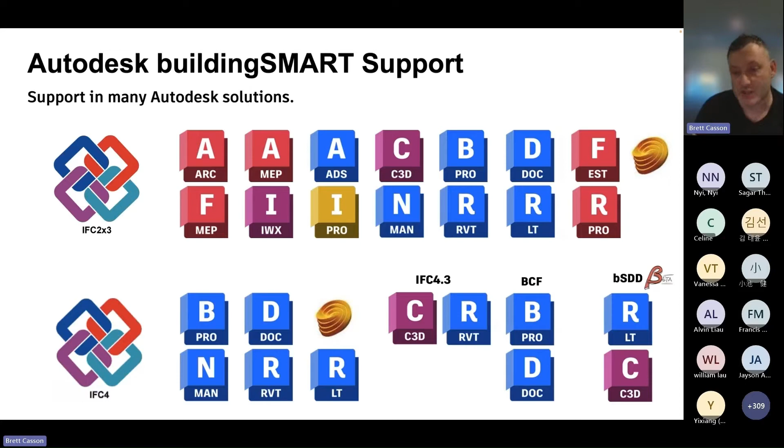and we're deeply committed to the open standard approach. And just as a quick reminder, I know this isn't about IFC 2x3, 4.3, BCF and bSDD, but our technologies do support all of those formats. We go through a rigorous campaign every year to ensure that our technology meets the requirements of IFC. And in fact, we've launched very recently our support for IFC 4.3, and we've got some work in beta for the bSDD initiative as well. So again, it's not just about this initiative, it's about a much broader context of interoperability.

The other thing that we've done is that we've put our support for Revit on GitHub. It was on SourceForge, but we decided to open that up and put it on GitHub. And I've got down there the Autodesk desktop app; that's changed to Autodesk Access. The reason we've done that is that we wanted to ensure that if there were major changes to IFC and our support for IFC, we could push those out very readily. And you, as the supply chain and the ecosystem and customers of Autodesk, could get those updates more readily rather than wait for a new release. And secondly, it enables us to receive direct feedback on how our technology is supporting IFC.

And we'll talk specifically now about why we are doing this as an industry. Because we need to unlock value. Interoperability is the linchpin of unlocking value. If we have solid interoperability between concept design, construction, and handover, we have value across the entire supply chain. But to do that, we have to unlock the data. So a lot of what the BCA are doing, and we congratulate the BCA for taking this initiative on, is to unlock data in the supply chain and ensure that we're deriving value from projects, not only building projects, but across building and infrastructure projects as well in the near future. And that's what IFC-SG and CORENET-X are there to achieve.

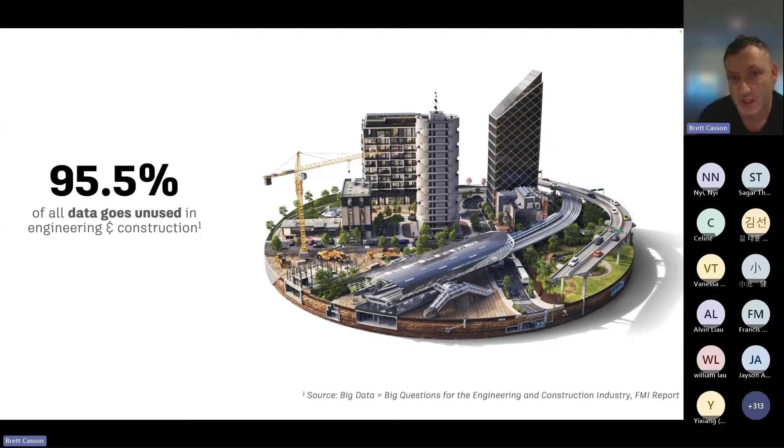One of the key reasons why we think this is really important is that we know that there is a lot of digital waste. There's a lot of data loss that happens in the industry. One report suggests that about 95 or 96% of all data goes unused in engineering and construction. And a lot of that data is our data, the public's data. And going forward, if we're going to have an unlocking of data and value in the supply chain, we've got to be better custodians of that data. That's why we support buildingSMART, but as importantly, we're supporting the BCA with this IFC-SG initiative. I've been working with Sagar and the team for almost 2 years now on this initiative.

And what that means for us over that 2 years is that we as Autodesk are creating a platform, and the minute that you create a data platform, you become a data company. And essentially that's what the BCA as an agency is doing as well. They are creating a platform and they are using data as the fuel and data as the engine. It's such an important initiative, not only for the building and construction industry, but for the whole of industry in Singapore. We have a series of tools that Sagar is going to touch on in a moment called the Autodesk Interoperability tools.

These tools support the enumeration, the validation, and the delivery of data when you use Autodesk technologies. And it's not just Revit technologies, we have technologies for Civil 3D and for other technologies as well. We are big supporters of standardization of data, but we've got to have the tools to support the way in which you standardize. We're going to talk about how we support IFC-SG in a moment and how we're utilizing these tools to help you as the customers be able to comply with the IFC-SG initiative.

All of these tools that we've spoken about are available for free at interoperability.autodesk.com/Singapore. We're working very closely with the BCA to ensure that our files that are hosted here are exactly the same files as what you can get from the BCA as well. And all of these check sets are in accordance with the latest version of IFC-SG, the most current version. And we've also created specific tools to support things like shared parameters and shared parameters file, specific to this initiative.

So we're really, really proud of this. I've been leading this with Sagar, as I said, for 2 years. We're extremely proud of where we're at. There's always room for improvement. And so that's why today is very, very important. There's 3 things that I want to leave everyone with today that will help us go forward as an industry. The first is this idea of unlocking data through interoperability. Interoperability is the key, data is the engine. And so as an industry, we need to do more in that space.

We are seeing a revolution from application to platform. Part of this initiative and looking further down the track with this initiative with the BCA in Singapore is about looking more at data and platform. And for us, having partnerships with everyone here today, plus our customers. So a multi-customer and partnership approach is exactly the right approach. We can't do this alone. And so that's why working with buildingSMART, the Singapore Institute of Architects, with the BCA and with other agencies and other institutions is supremely important, because we only know what we know and we need that collaboration for this to work. And so we're really proud of where we're at.

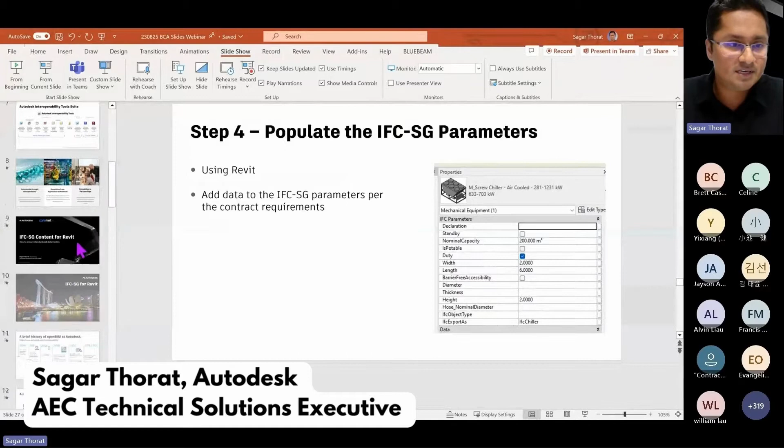So I'm going to share my screen now, and thanks everybody for joining, and thanks for all the presenters earlier. So let me just get started. All right, so our focus today is to understand the content that is relevant to IFC-SG for Revit. How do you ensure standardized data models? Most of you joining today are architects and consultants, and as the creators of this data and the BIM authoring that you do, it's important that that's conditioned for IFC-SG for you to have a successful CORENET-X submission.

So we have a set of tools and content that enables you to do this, to successfully export IFC-SG models, not only export, but prepare them. So we are talking about the shared parameters tool, standardized data tool, the model checker, and the content. You would have the shared parameters tool configuration file and the model checker check set for IFC-SG and a web page that will host all of this data.

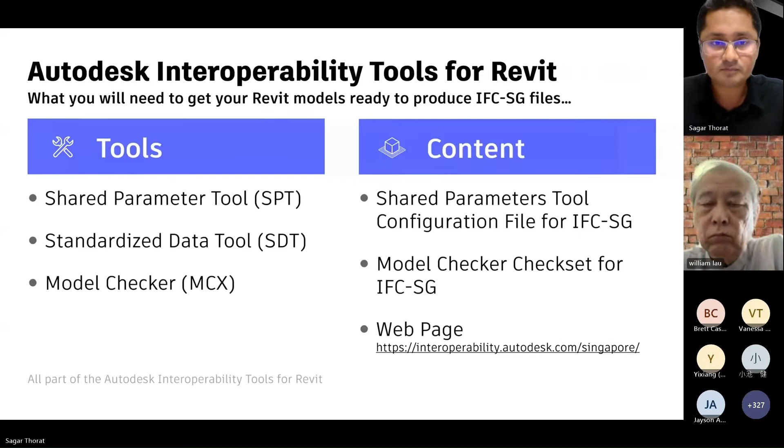Now we will understand where you can download these Autodesk interoperability tools and how you can install them. Most of the people might be familiar with this web page, so I'm just going to show it to you live. The link that normally everybody accesses as Autodesk customers is manage.autodesk.com. Here is where your IT or you yourself, if you have access, is able to manage all your software as well as all the plugins in it.

So if you go to all products and services, within that you will be able to search for Revit, and in that you'll have the interoperability tools. If you search for Revit, for example, within Revit you can view the details, and there you go, all your versions, the current version minus 3 versions, including 2023, 2022, and 2021. For all these versions, going under extension, you will see the interoperability tools version 9.1.8599, which was just released on August 9th, where you will find this tool complete. So the shared parameters tool has been released and is included in this version only.

The earlier versions don't have it. So if you have the earlier versions installed of the Autodesk interoperability tools, also called the BIM interoperability tools, please uninstall those versions and install the newer version. For all Revit versions, you can install them. You can install them from 2021, 2022, 2023, and 2024, right?

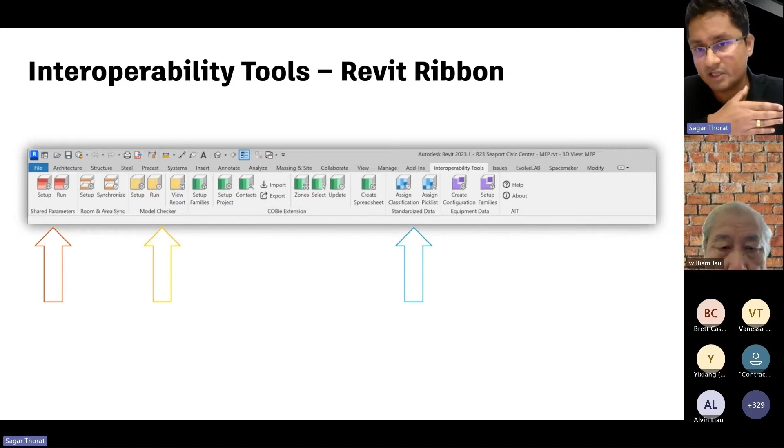And you will see on the left, to begin with, we have the shared parameters tool, we have the model checker, and we have the standardized data tool. These are the 3 key tools that you would need to be successful for IFC-SG classification, as well as preparation of your models and exporting them out. Okay. Now, these are available for current version minus 3 versions. So please remember, these are all standard across all Revit versions, current minus 3.

Okay, now the first key file is the configuration file, which is available to you for you to open and check, but ideally you shouldn't be directly doing it, you can directly set that file to be used, and you can associate the parameters straight away.

Okay. We have a check set file, which is called the MCX check set file, the model checker for Revit. The model checker for Revit, please understand that this is for parameters and values only. This is not for object-based, rule-based checking, which CORENET-X does, right? This is purely for you to have a clean IFC-SG model such that you can export them correctly, right?

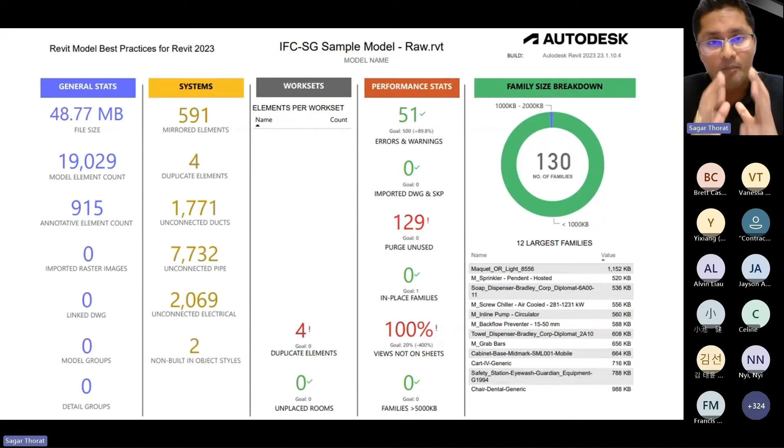So apart from the model checker itself, the model checker does include best practices, right? All the Revit users today, or all the BIM managers, BIM coordinators, should be utilizing this particular function, which enables you to create a dashboard and check your model health, right? Model health is super critical because this reduces the export time to IFC. Remember, you are exporting from Revit to IFC, and if you want to reduce the time of export, you would need a healthy model, right?

Healthy model simply means minimum duplicate elements, having views not on sheets, for example, or having unused files purged. Having a clean model is super important, right? So model health checks are crucial for you to export IFC models at a later stage.

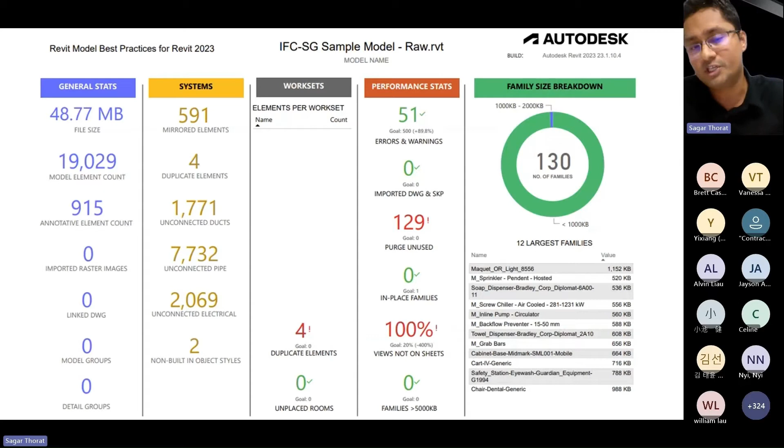So quickly looking at the parameters, step 1, which is your shared parameters file, which can be directly hosted inside your tool, and you can run it to add all your parameters. And then the second step is assigning IFC classification. It's a crucial step. Without assigning an IFC4 classification, you will not be able to export the IFC-SG correctly. Remember that classification is super important, right?

So let's dive straight into the demonstration. So our first part of the demonstration is to cover the adding of IFC-SG parameters using the shared parameters tool. And we will also cover populating the IFC classes. Yeah. So let's look at how you can use the shared parameters tool for adding IFC-SG parameters.

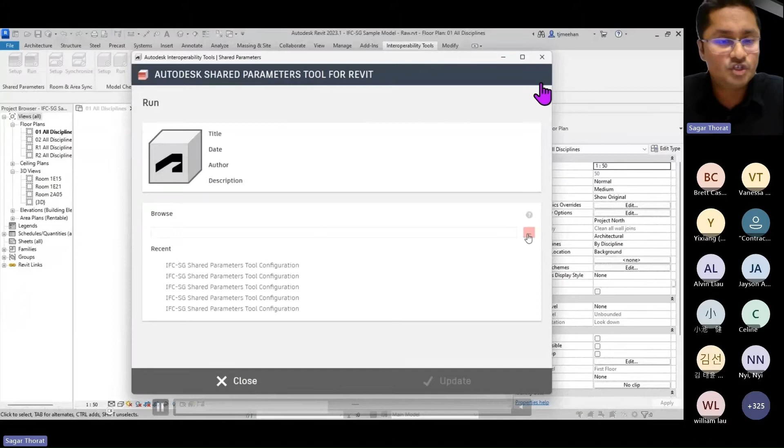Yeah. So let's get into Revit, right? So we will use Revit 2023 for this demonstration, and we will be looking at interoperability tools in the ribbon. And over here, the shared parameters tool can be activated. You will be choosing the configuration file, which is a simple XML file, and you will be running this file straight away, right? So once you have chosen, you simply update, and all your IFC-SG parameters will be added to your model. Whether it is an architectural model, structure model, or an MEP model, doesn't matter.

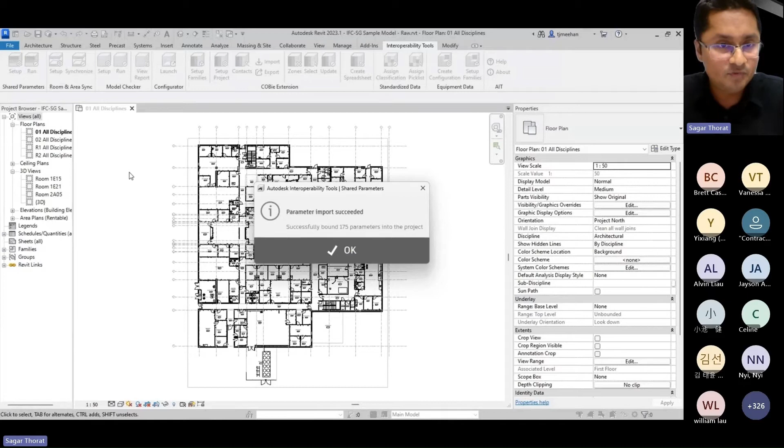All the parameters will be successfully added to the model without you going through the hassle of adding each shared parameter one by one, or going through the hassle of adding it through your Manage tab in Revit, right? So it's a simple 3-step process.

The second is populating of IFC classes. Populating of IFC classes is important because, remember, IFC-SG is based upon IFC 4.1, right? So IFC classes of 4.1 is what applies to IFC-SG. Hence, the IFC classification is super important. So what we would need is the standardized data tool, which is for assigning these classifications straight away.

So let's say, for example, I have this particular chiller. Now I have assigned all the IFC classes to it. Here are your IFC parameters, which are already populated. But what we need to do is to be able to populate the IFC export as well. So this is the classification which you would need to populate straight away. There you go. This is your IFC Export As, and how would you populate that?

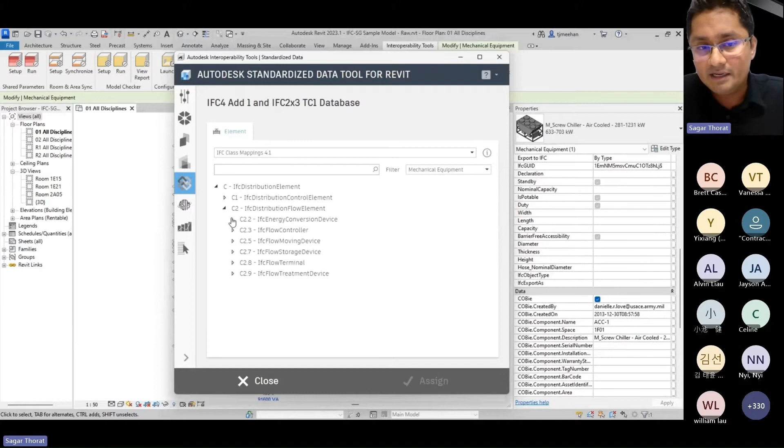By going to the standardized data tool and having the assign classification activated. Once you open the assign classification dialog, you would have to load in the IFC4. The IFC4 class mappings for 4.1 will automatically detect which element it is, and you can automatically select the IFC chiller in this case, and I can assign this classification to all the chillers at once. And there you go. You'll have the IFC chiller assigned to the IFC Export As value.

Remember, only the IFC Export As value is to be populated, not any other, such as Export to IFC As, which I'll touch base on in a while. So for example, here you would have the Export to IFC As and the IFC Export As. This is a default parameter from 2023 onwards. So remember that you do not have to touch this at all.

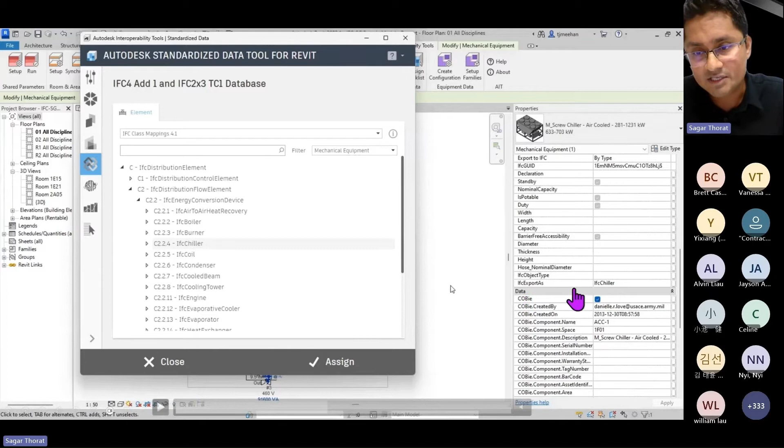Just focus on the IFC Export As parameter, which gets populated as part of your shared parameters when you populate the parameters from IFC-SG. So remember, only IFC Export As is to be used for classification. Do not use the Export to IFC As, which we have used to deliver this for other markets. But for Singapore, we will only use the IFC Export As. This will be covered in the guide as well when we prepare it.

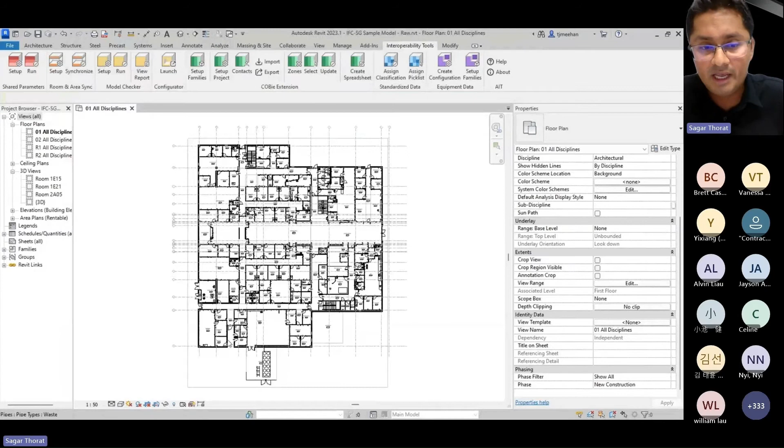All right. So once you have assigned the classification, you can do this for different Revit categories. For example, for pumps, in this case the centrifugal pump, I can assign this classification as well. So here you have the pump, and I can choose that particular subclass and the parent class and assign that to the model itself.

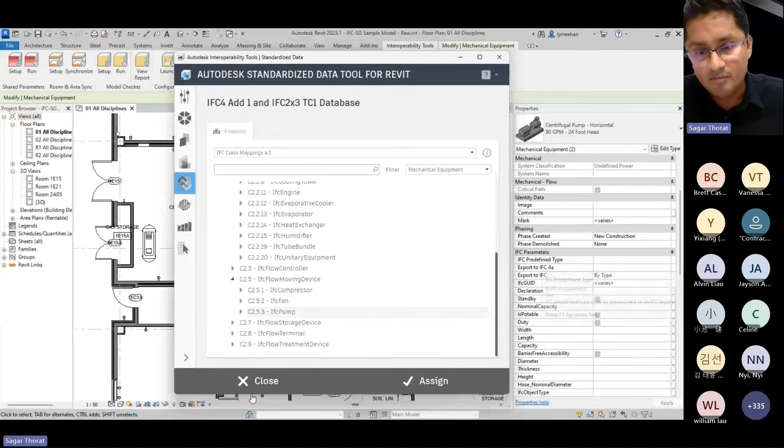Now remember that all these parameters are grouped under the IFC Parameters grouping itself, okay? So remember that the IFC Export As parameter will be grouped under the IFC Parameters. All of them will be grouped under this.

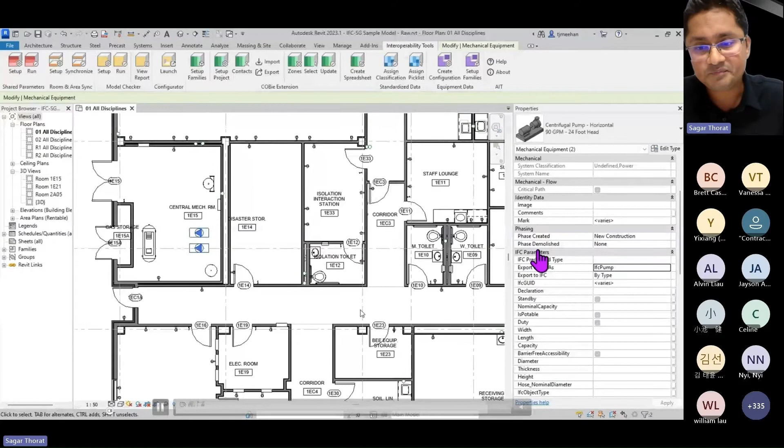So we covered two aspects, and we'll go into step 3 now. Step 3 is validation of these parameters. Once you have added the IFC-SG parameters and the IFC classification, now you need to validate it, to make sure that all the models your modelers, BIM engineers or BIM architects are preparing are correct. Each appointed party or task team would have to do this model checking. So you'll use the Model Checker for Revit for this one.

And step 4 will be populating the values, and the final step is to export to IFC. So let's run through the steps now. Step 3, as we mentioned, is to check your models. In order to check your models, you would have to validate these parameters. And that's where you will download the model checker XML file, which is the model checker configuration file. You can download that from the interoperability website.

So similar to the shared parameters file, the model checker file can also be downloaded from the same web portal where all the data is hosted.

Okay, so this is where the model checker file is. You will be able to download it right here. The model checker check set. It's clearly dependent upon the shared parameters tool configuration file itself. So this is your check set, this is where you can download it. And once you have downloaded it, it simply can be used for checking your models.

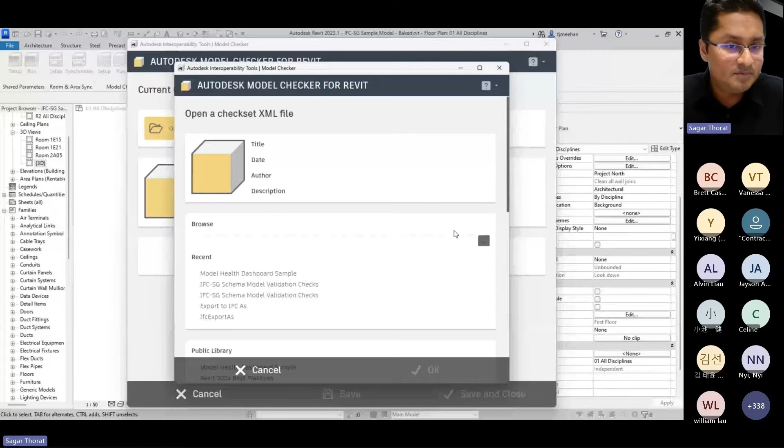Again, remember, these are all open data formats. It's an XML format, right? So here you go. We will use the model checker. First thing, of course, you can set this up. Setting up is simply selecting the particular configuration file, the model check file. Okay, that's the one with an XML extension. You can open it up, and there you go.

You can then choose which version of Revit you are using. There are checks for 2023, 2024, and 2022 and older versions. These have been separated because of the IFC export as and the export to IFC as, right? So please remember that people who are using 2023 and 2024 would have to use the checking for that particular version. And you can also filter by discipline, right?

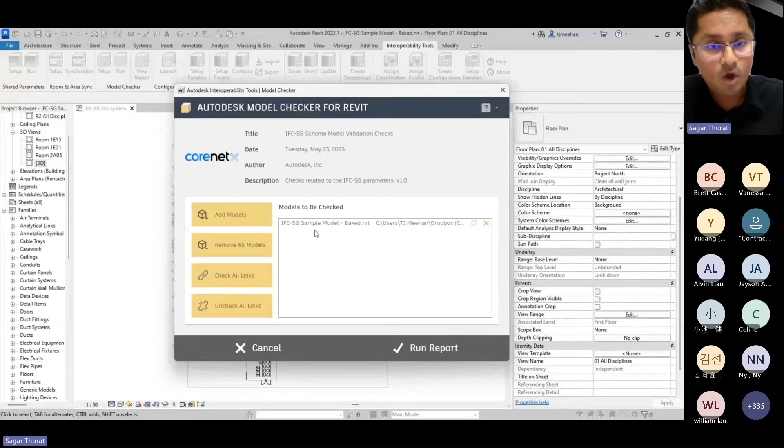So if you're just modeling the architecture part and you do not want to check anything related to mechanical and structure, the model checker allows you to do so, right? So you can specifically select only the Archi model and components, and you can run the checks on the models that are open, as well as the models that are linked to that particular Revit model. Yeah, so remember, you can run the checks on both. And within a minute or so, you should have the results. Depending on the model size, it might take 2 minutes or 5 minutes or so on.

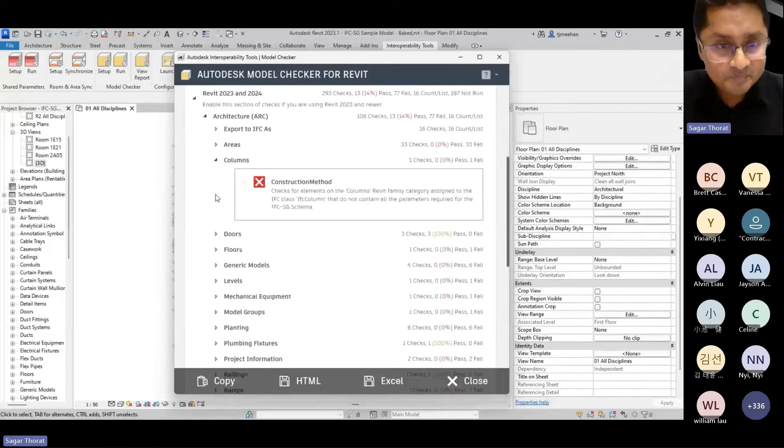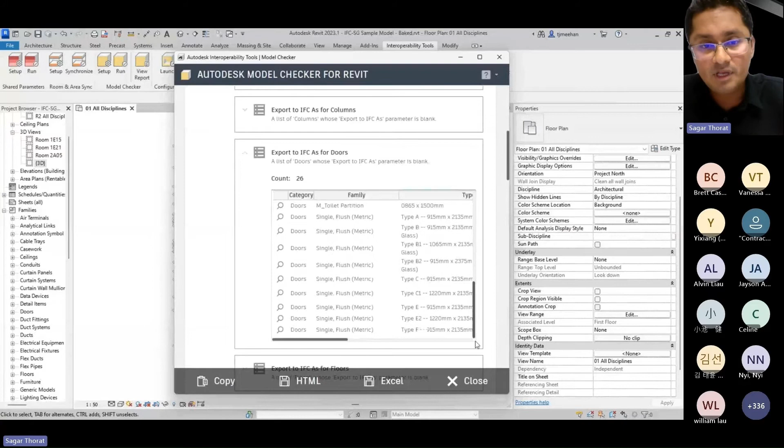So here I have some errors. The reason is that my model does not contain any columns, right? And we can see that there have been some checks for floors also which have failed. And for doors, we have them passed. So the model checker gives you a clear indication of which Revit categories have failed and which have passed, right? So once they have failed or the parameter is left blank, you can actually go and check them one by one or in groups, right?

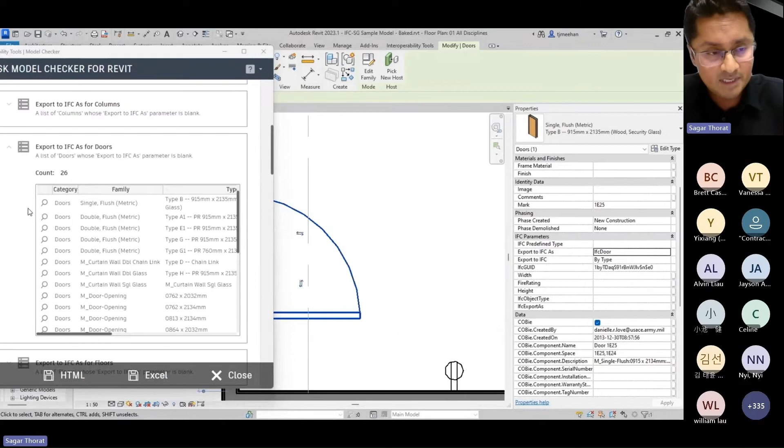So it allows you to select that particular door, which let's say does not have an IFC export as, so people forgot to actually add in the classification, right? So in this case, you can straight away choose the IFC export as classification and run the check again, and you'll see that you will not have that error anymore, right? So you can always rerun these checks multiple times as you wish. So we are done with step 3, and then we go to step 4.

Step 4 is critical, populating the IFC-SG parameters, which in general are the values, right? Now, values would differ from project to project and from team to team, right? So there is no such governance process for this particular reason, but values can directly be populated either manually or you can automatically set those up into your families, right? So if you look at the IFC parameters themselves, you can see that I can uncheck is potable, I can uncheck is barrier free, and I can start adding the widths and the lengths and the diameters.

But if I don't want to do this manually, I would want to set this up into the family itself, right? So one of the most critical steps is to set up these values or generate them through a formula inside the family, right? So let's say we have this particular family, which is a screw chiller. And you can see that under this particular chiller, there are values like lengths, offsets, diameters, and so on. And I would want to use these values to populate my IFC parameters directly without manually adding them, to avoid any error.

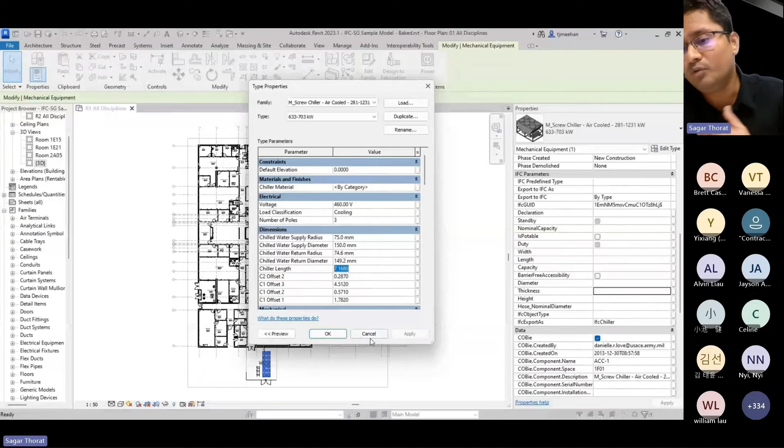In this case, I would get into the edit family mode for Revit, and then I would populate all the IFC parameters first within that family, right? And please note that only the parameters that are required for the family will be assigned. So in this case, for this particular chiller family, only 15 parameters are required because these have been defined by IFC-SG, that we only need these 15 parameters to be reported, right? So hence, the rest of the parameters will be ignored.

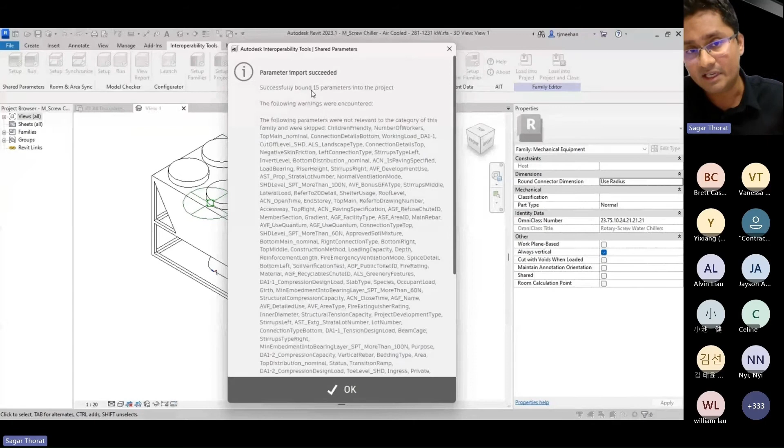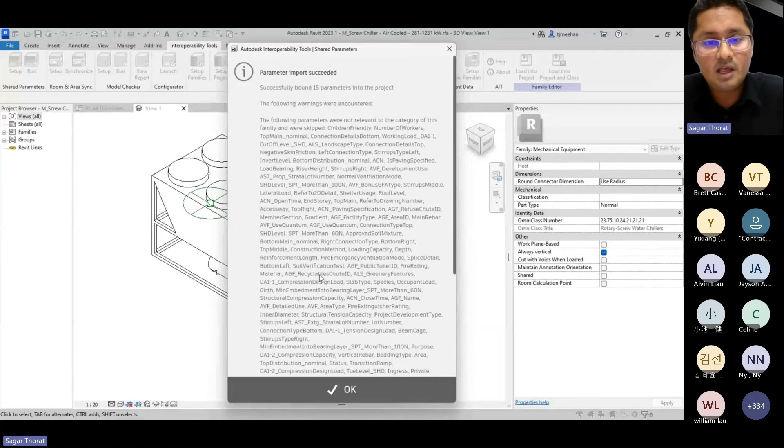Now, I would like to emphasize and highlight this, that there has been quite a lot of work going on in the back end in terms of coding this such that all other parameters of all other families, there may be 1,000 families, are now ignored, and only the parameters that logically fit the family will be assigned. So this is a big step that we have taken forward, that you're able to assign it only to the family. Yeah, nice. So let's move on from here. Once we have the parameters assigned, now what we would need to do is just to prepare a formula that will help you drive these values through, right?

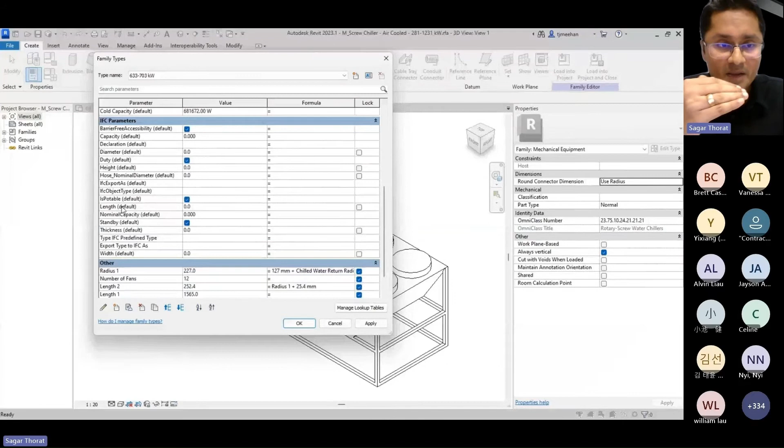And people who are already used to Revit would understand that under the properties for family types in Revit, you can actually now go ahead and copy the name of the dimension. Let's say in this case, chiller length, copy that and go to your IFC parameters, the 15 parameters which just got populated, and in the formula column, simply enter the chiller length and apply it, right? What this will do is it will automatically relate the family value to the IFC-SG parameter value, and it will beautifully assign it to that.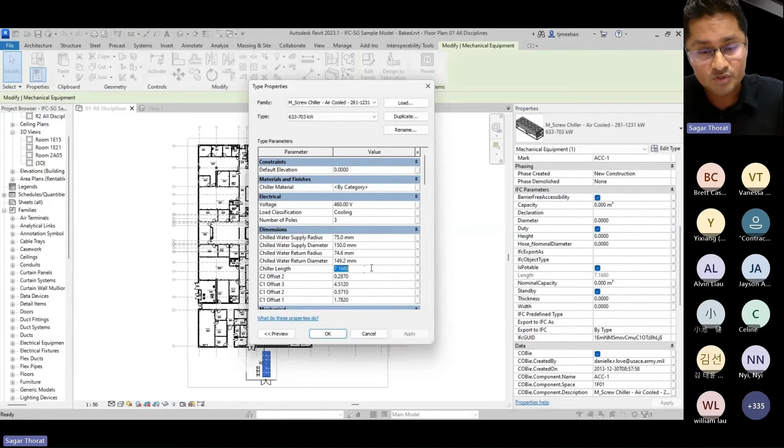And once you have overwritten the family, you will see that the value will now be assigned and it will be locked. Most important, now it is locked so that people will not make errors, right? So this is a great way to prepare your families and to be able to assign all the values. Very important step. And if you change the value, you will see it automatically updates in the IFC-SG parameter. Yeah. So that's something which was quite a leap, months of work on that. So really, this is the crux of it, right?

Ultimately, once you are ready with the model, the checking is done. The final step is exporting to IFC, which is the easiest of all, right? And in order for you to export to IFC, you would need the latest IFC exporter, which I've already shown you where you can download it. Manage.autodesk.com, again, going to your products and services, and straight away in there, finding the latest IFC exporter for your current version, and utilizing that to export it to IFC. Like in this case, we have the IFC version 24 for Revit 2022, 2024, and Revit 23. I can download it and install it, right?

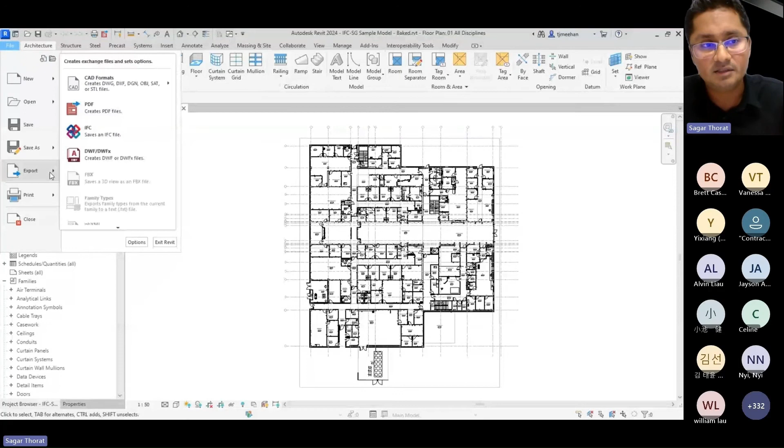So this is important. Please download the latest exporters. Do not work with old exporters because we have to constantly update the exporting functionality. And Revit can directly export IFC straight away. And people who are using 2024 would have the IFC-SG regulatory requirements JSON file integrated in the exporter, right? The earlier versions do not have this, for which you can simply use the JSON files that we will provide you. And done, right? Straightforward. We have now exported IFC-SG, and what we really need now is your feedback after using or implementing this workflow.

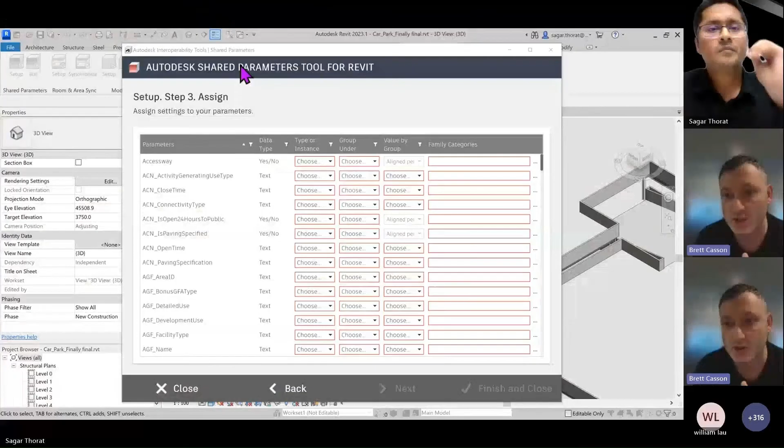That's fine. And just to give everyone some further context, the way in which traditionally you would manage shared parameters was a bit cumbersome, and the way you would copy schedules and those sorts of things. So we wanted to get away from that and rationalize that process. We work very closely with the BCA on this, and we've created a specific tool that's available today called the Shared Parameters tool, which alleviates some of those technical issues when it comes to using shared parameters across Revit files. So we urge you to download that tool and start using it. There are some YouTube videos that walk you through that, and Sagar's going to show you how that works today.

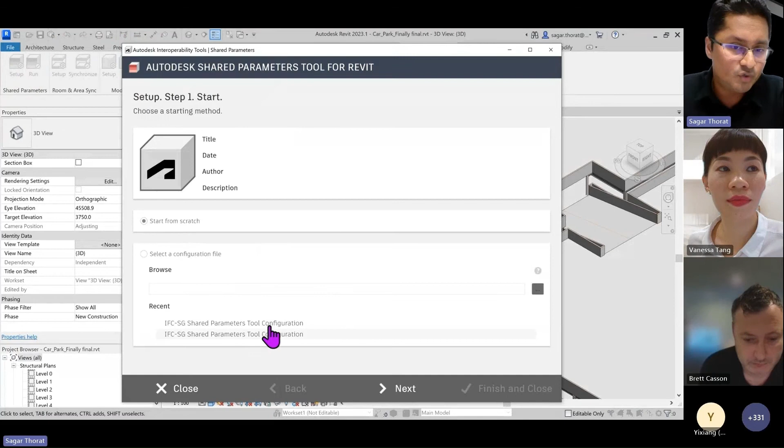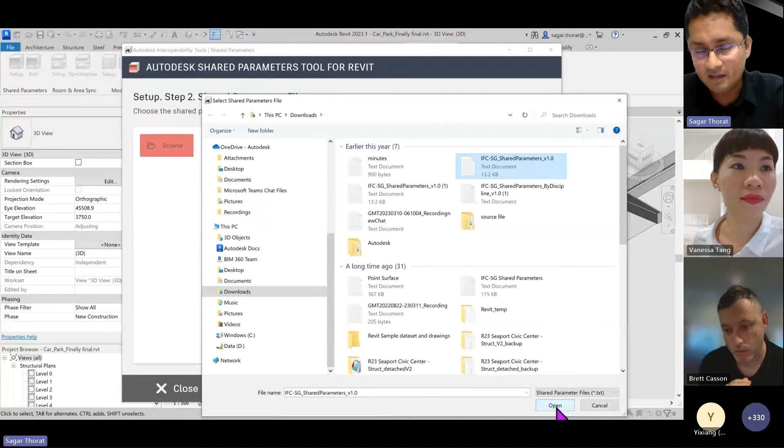So we have this set up and run over here. In general, when you set up the file, you can start from scratch or use the current tool that we have, right? So let's say you start from scratch, and if I go next, I can browse to the IFC-SG shared parameters version 1 by the CORENET-X team, which you can download from the CORENET-X website. Then I can open this file and it straight away templatizes those parameters. There you go. All the 1000-over parameters are now in a single template. And here you have a choice to group select them and straight away make them instance parameters, for example, or group them under a certain category.

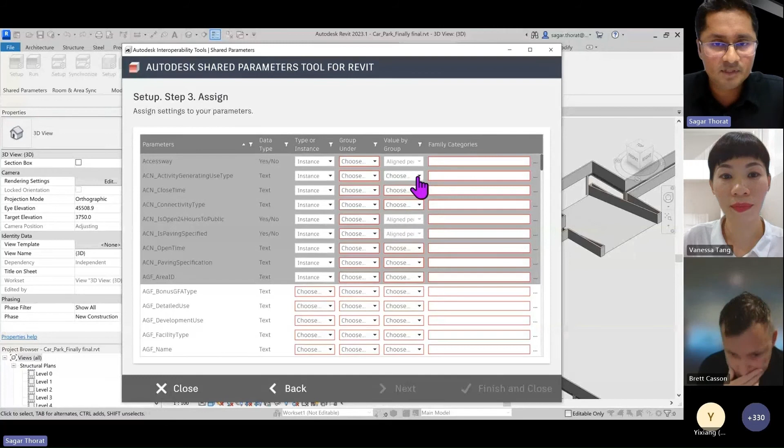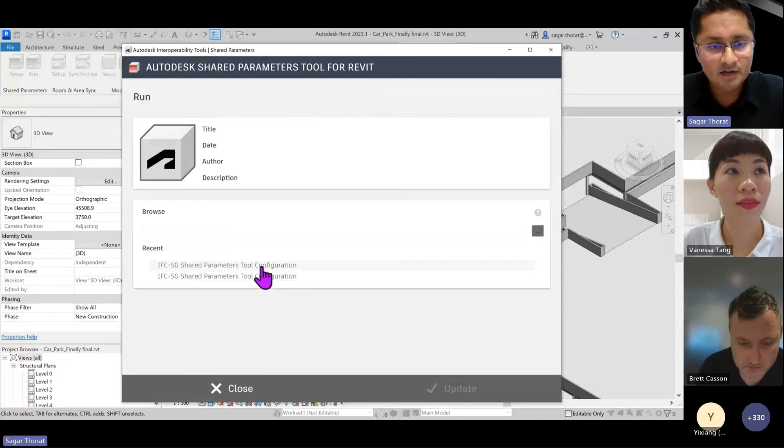And value by group, wherever there's a value by group possible, you can vary them or align them by group type. And then you can assign them to a family category as well, right? And once you have done so, then you can just simply click next and move on to save this file so that you can directly use it inside Revit. So that's how easy it is. And you can then later run that file and update, and all the parameters will get updated straight up.

Yeah. So all right, Sagar. I think while you're on this demo, maybe we can take Jenny's question, who is asking, is there an inbuilt checker to check values? Like if the railing height is above 1 meter. So Brett, do you want to take that question?

Yeah, that's a great question. I love that question. At the moment, with the model checker we can check a value. So we can check whether, first of all, there is a value associated with the parameter, and we can check what that value is. What we can't check is logic. So we can't check whether the distance from one wall to the door is the square root of something or a formulaic value. We can't check that logic.

We know that that's where we probably need to get to in the future, but right now it's about whether it's populated and what that parameter is and whether it is something that is within the limits. And so we can use the model checker configuration file to do that, and the desktop app as the model checker for Revit. So it's a great question. I understand why you've asked the question, but right now the tool doesn't quite do that.

All right. Now, there are some interesting questions coming in, just for some variety. There's a question from Milos Jovanovic. Thank you for your question. You're asking, are there any other vendors that support the export to IFC-SG? So it's a similar question to what Kyung Kiet has asked. So yes, the answer is yes. You can see that Yixiang has responded directly in the chat box. There are a few other products that support IFC-SG.